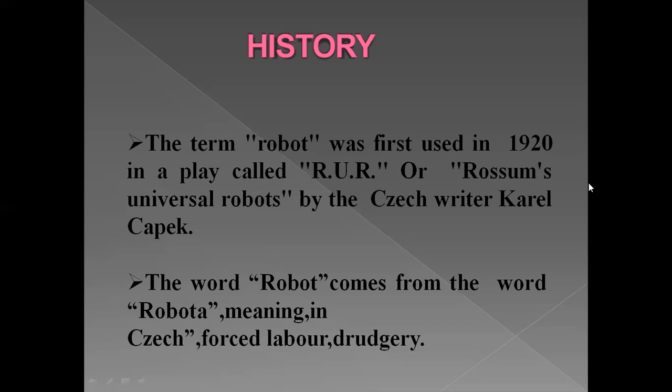These are some terminologies of robotics. Robot, basically a mechanical device, is a machine that performs some human task either automatically or by some remote control. Robotics is the study and application of robot technology in machines.

Telerobotics are those robots which are operated remotely. Remotely means machines are somewhere and they are operated from some other side, with the help of a remote control or with the help of another area which is far.

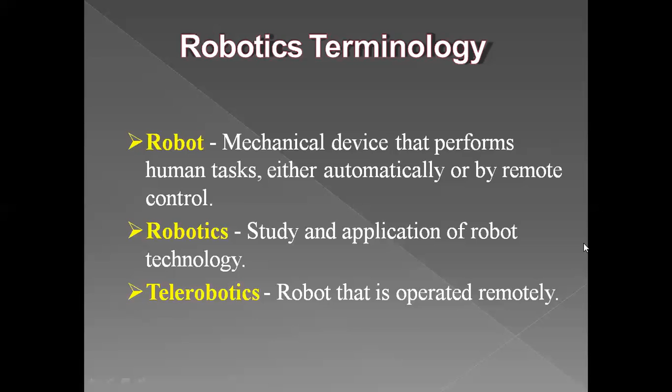What is a robot? A robot is basically a reprogrammable, multifunctional manipulator designed to move material, parts, tools, or specialized devices through various programmed motions for the performance of a variety of tasks. This definition was given by the Robot Institute of America.

So we can say that a robot is a machine which can perform a number of tasks on the basis of the functions for which they are programmed. Like we have robots for moving material from one place to another place. They are designed to work as waiters. They are used in manufacturing companies for assembling the units in the automobile industry.

So robots are reprogrammable machines which can be designed to move material, some parts. They are programmed for doing such motions for performing various types of tasks.

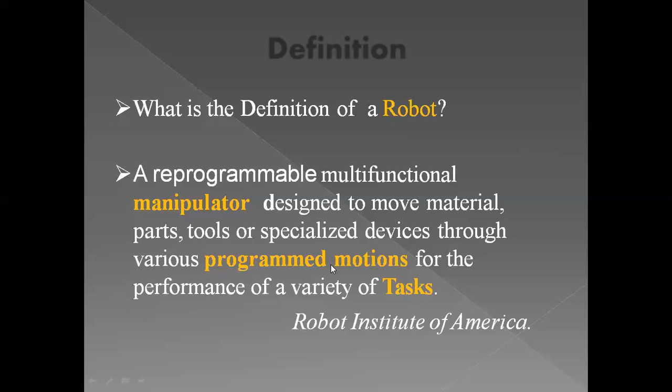Laws of robotics. There are 3 laws of robotics given by Asimov. Law 1: a robot may not injure a human being, or through inaction allow a human being to come to harm. This means when we design a robot, we keep in mind that it may not injure a human being, and it must not allow a human being to come to harm.

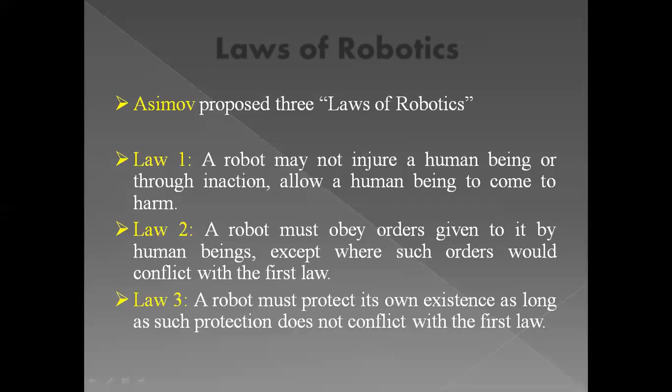Law 2: a robot must obey orders given to it by human beings, except where such orders would conflict with the first law. This means the robot will obey all those orders for which they are programmed by human beings, except for orders which conflict with law 1, meaning they would harm a human being. Law 3: a robot must protect its own existence as long as such protection does not conflict with the first law. So these are the 3 laws of robotics.

The robot control loop. A robot can be controlled with the help of 3 components which work in a loop: sense, think, act.

Sense means the intake they are taking, or the input they are taking. This input can be speech, a human command, vision, acceleration, temperature, position, distance, touch, force, magnetic field, light, sound, or position sense, through which they can take input.

On this input, they can think. Thinking of what? They can plan the task, classify the task, learn something new, process the data, plan the path, plan the motion—whatever task they have to perform, on that task they can think.

After thinking, they can perform the action, which is called the act. This is basically the output performed by the robots, meaning move, speech, text, moving their arms or legs or tracks. The output, meaning the operation they have to perform, comes under the act.

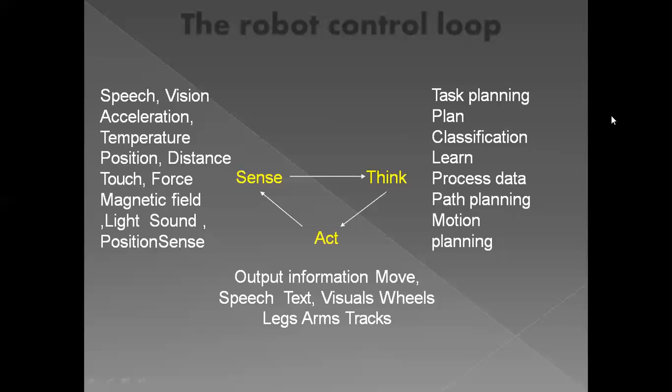I say that a robot is a technology made of artificial intelligence, machine learning, expert system, and all. So what is artificial intelligence? First of all, artificial intelligence is the intelligence exhibited by machines, or acquired by machines or softwares with the help of artificial knowledge. It is a branch of computer science which helps develop such machines or softwares which are intelligent, more intelligent than the previous machines.

This means they can not only take some commands or some inputs, but also think on them, plan something, and according to the knowledge acquired by them, the information acquired by them, they perform some act like a human being.

Major AI researchers and textbooks define AI as the study and design of intelligent agents, where an intelligent agent is a system that perceives its environment and takes actions that maximize its chances of success. John McCarthy coined the term artificial intelligence in 1955 and defines it as the science and engineering of making intelligent machines, which can think and perform actions based on the conditions present in front of them, like a human being.

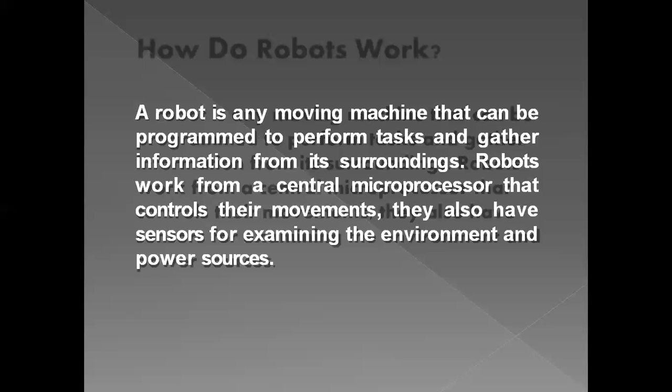So a robot is a moving machine that can be programmed to perform tasks and gather information from its surroundings. Robots work from a central microprocessor that controls their movements. They also have sensors for examining the environment, and power sources.

Types of robots: we have a number of types of robots for different areas or applications. We have industrial robots, used for handling materials in various types of industries like the automobile industry, manufacturing industries, and textile industries—handling materials, welding components, performing inspections, and improving productivity to produce more manufactured products compared to human beings, as well as laboratory applications for performing research and so on.

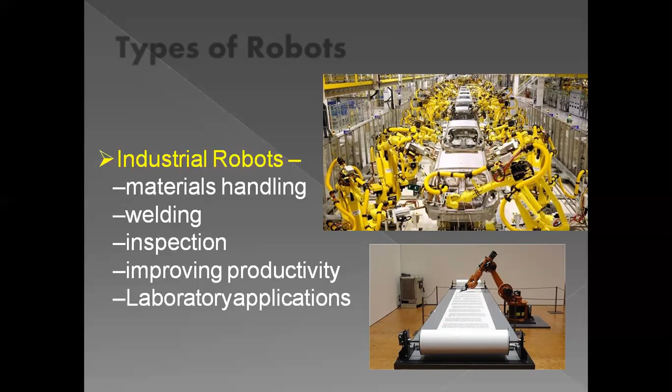Mobile robots move around on their legs, tracks, or wheels. For example, we have the rover, the robot sent to Mars to collect information regarding the environment of Mars. This robot has wheels on which it can move.

In 1979, a nuclear accident in the USA caused a leak of radioactive material, which led to the production of a special robot that could handle radioactive material. These mobile robots can move to places where human movement is not possible or very dangerous, so we can send them for performing various operations, as in the example of the rover sent to Mars.

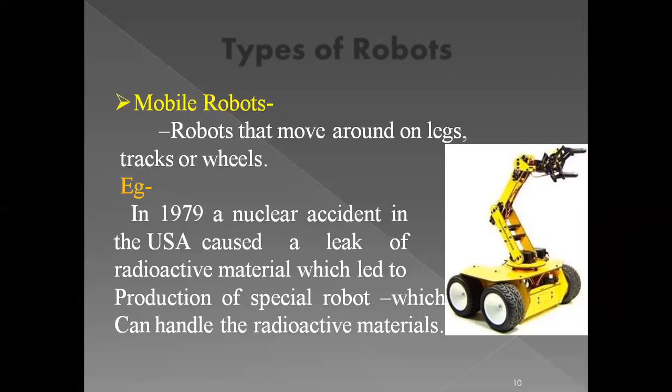Then we have educational robots. These are basically robotic kits used extensively in education and training, like RoboLab, Lego, and RoboCup Soccer—kits used for education and training of scholars in schools and universities, and for training employees.

Then we have domestic robots, which are of two types. Domestic robots can be designed to perform household tasks, and modern toys which are programmed to talk, walk, and dance for children—basically robotic toys for children that can talk, walk, dance, and perform other entertaining activities.

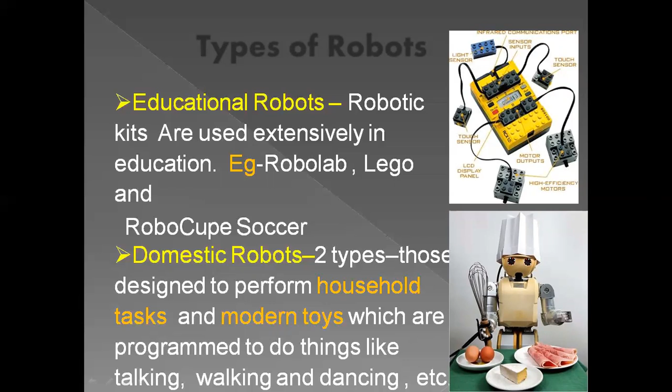Robot components: a robot has four components—manipulator or rover, end effector, actuator, and sensors. The manipulator or rover is the main body of the robot; all the links, joints, and other structural elements are placed in it. The end effector is the part connected to the manipulator—this is the last joint, like a hand.

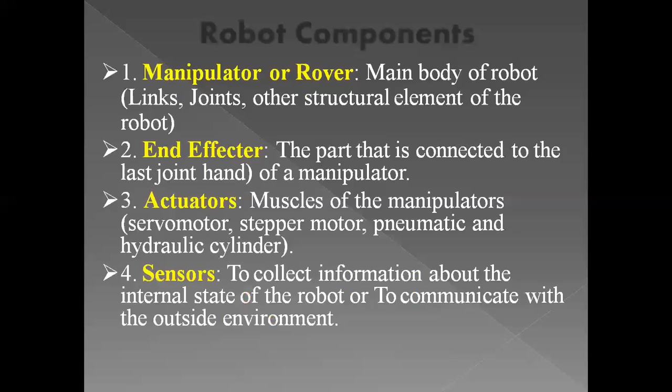Actuators work as the muscles of the manipulator; these are servo motors, stepper motors, pneumatic and hydraulic cylinders. Sensors collect information about the internal state of the robot and communicate with the outside environment—what is happening inside the robot and with the outer environment, so the robot can perform its task accordingly. Some more components include the controller.

Controller is like the cerebellum of a human being, part of the human brain. It basically controls and coordinates the motion of actuators - the processor is the actual brain of the robot. It calculates the motions and velocity of the robot's joints, and like the human brain, gives messages to other body parts to perform their actions.

Similarly, the processor of the robot also calculates the motions and velocities of the robot's joints and provides information to various parts of the robot to perform their actions accordingly. Last but not least, software.

This can be an operating system, this can be robotic software, and the collection of various routines which work in combination with the robotic software and operating systems to perform robotic operations like movement, transmission of material from one place to another, production, and many more.

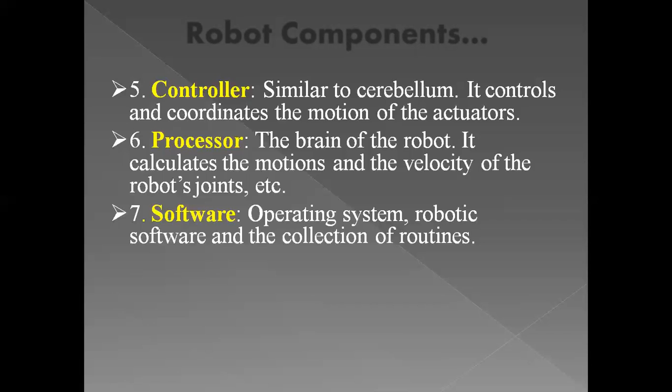Sensors are one of the most important parts of the robot. Sensors provide the awareness of the environment by sensing things. Sensors are the core of robots - it is the system that alerts the robot.

Sensing can be in different forms. It can be light, sound, heat, chemicals, force, object proximity, physical orientation or position, magnetic and electric fields, or resistance. A robot can have one or more sensors.

According to the operation they perform and the environment they are made for, robots can have one or more sensors. Minimum, they have one of these sensors: light, sound, heat, chemical, force, object proximity, physical orientation, position, magnetic and electric fields, or resistance. In some special robots, these can be more than one.

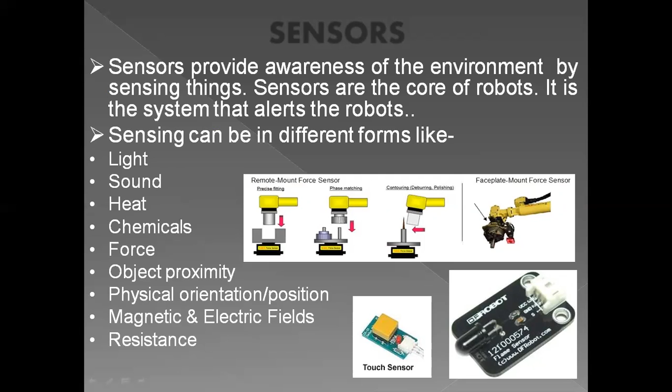Actuators are for locomotion or manipulation. Locomotive operations, the movement of the robot from one place to another, can be done with the help of actuators, and accordingly, the manipulation of various operations is also performed by the actuators.

So what comes under locomotion? Locomotion includes legs, wheels, and other exotic means like this. Here, these are the legs. Here, wheels are working as the legs.

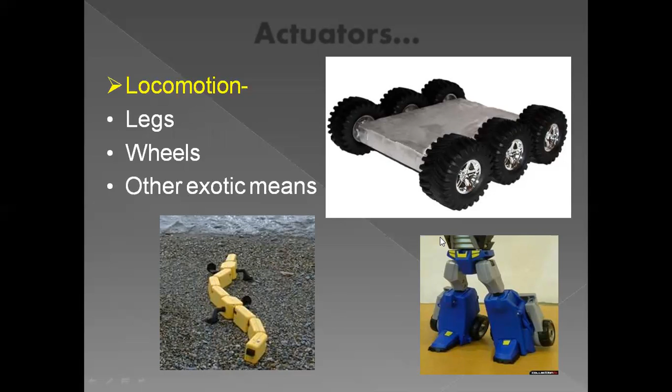Manipulators are of many types. Degree of freedom means the degree to which they can control their components of motion - how much angle or degree they can move their locomotive components like legs and arms. Second, arms: the convenient method to allow full movement in 3D, mostly used in fixed robots due to power and weight, more difficult to control due to extra degrees of freedom.

Grippers may be very simple - these are two rigid arms to pick up objects. They are designed to pick the object and move it from one place to another place. So they are simple but rigid.

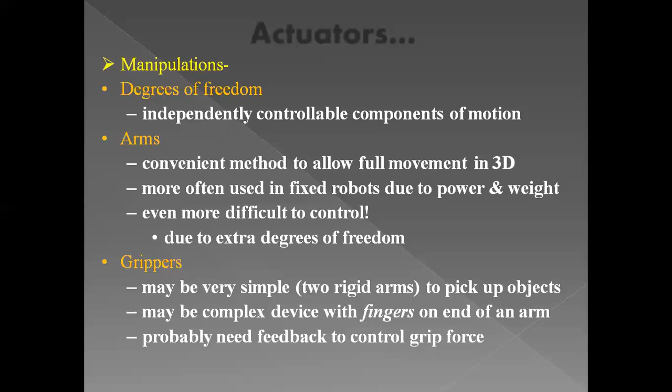In robotics, an end effector is the device at the end of a robotic arm. They are designed to interact with the environment. An end effector may consist of a gripper or a tool. The gripper can have 2 fingers, 3 fingers, or even 5 fingers. And a tool can be a hammer or some other tool used for performing the operation.

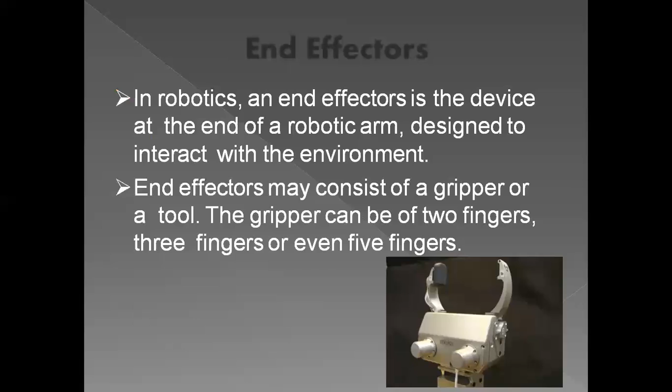Degrees of freedom means the plane in which a robot can move or maneuver. For degree of freedom, a robot requires some components.

These are: rotate base of the arm, which is basically the base from which the arm is implementing. Pivot base of the arm is like our elbow, which is used - it is basically the joint of the arm.

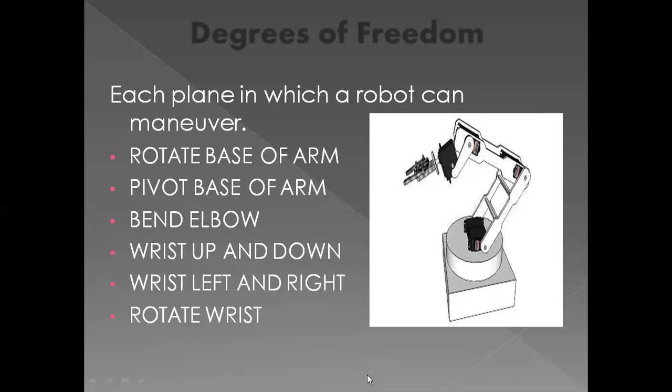Bend elbow is like our elbow, which helps the arm to bend, to move up and down. Wrist up and down is like the wrist of a human being, used to rotate our hand or fingers in all directions. Wrist left-right is used to move the wrist left and right. And rotate wrist helps rotate the wrist in all directions.

The purpose of robots: they are used in many tasks - dirty tasks, repetitive tasks, dangerous tasks, impossible tasks. Robots assist the handicapped, can operate equipment at much higher precision than humans, and are cheaper on a long term basis.

Dirty task means the task where the dirt is to be cleaned, like a sweeper. They can be used for some repetitive tasks like manufacturing industries, where they are used for assembling the products again and again. Dangerous tasks are where human beings' lives should be in danger.

The robots can be sent to perform the operation, like I have given the example of rover sent to Mars. Impossible tasks, which cannot be done by human beings, can be performed with the help of robots.

In today's world, robots are also assisting handicapped people, like the robotic arm. A robotic arm is an arm which can be attached to a human being who has lost his arm. This arm works similarly to a human being's arm. They have sensors connected to the nerves of the human being.

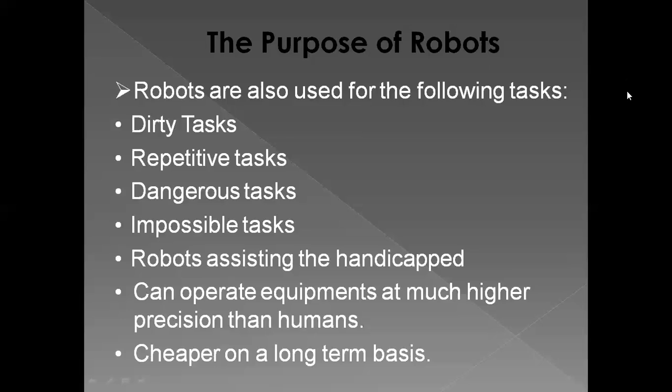Robotics applications - the areas where robotics are used nowadays: exploration, like space missions, robots in the Antarctic region, exploring volcanoes where human beings cannot be sent, underwater explorations, and medical sciences.

In medical sciences also, the robots are performing a number of operations. They are performing surgeries, nanosurgeries, and they are used for performing various types of diagnosis of diseases.

Assemblies in manufacturing companies - they are used for assembling parts, handling material, denting and painting, surveillance and security like bomb disposal, etc., and home help also, like grass cutting and nursing.

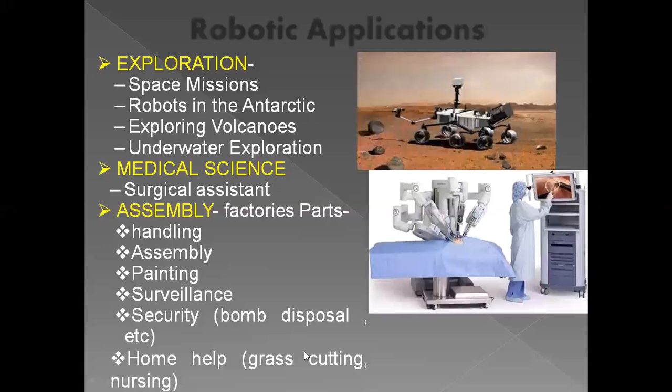Advantages of robotics - there are a number of advantages. We can send them to far away planets, we can send them to unknown waters, underwater areas, mines where humans can be crushed or their life can be in danger.

Robots can give us information that humans can't get from any other sources. Robots can work at places 24 by 7 without any salary and food, without any restlessness, and they don't get bored. As they don't get bored, they can work 24 by 7. They can perform tasks more faster than human beings, and more consistently and accurately.

Most robots are automatic, so they cannot be programmed again and again - they are programmed once and they become automatic, so they can go around by themselves without any human interference. They can perform their operations without any human interference.

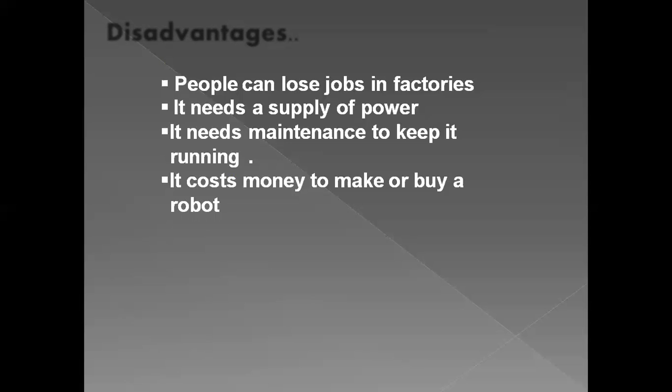Future prospects in robotics: scientists say that it is possible a robot with a brain will exist by 2019, but till now they have not succeeded, and they are doing more research in that area.

Vernor Vinge has suggested that a moment may come when computers and robots are smarter than humans. In 2009, some robots acquired various forms of semi-autonomy, including being able to find power sources on their own. The Association for the Advancement of Artificial Intelligence has researched this problem.